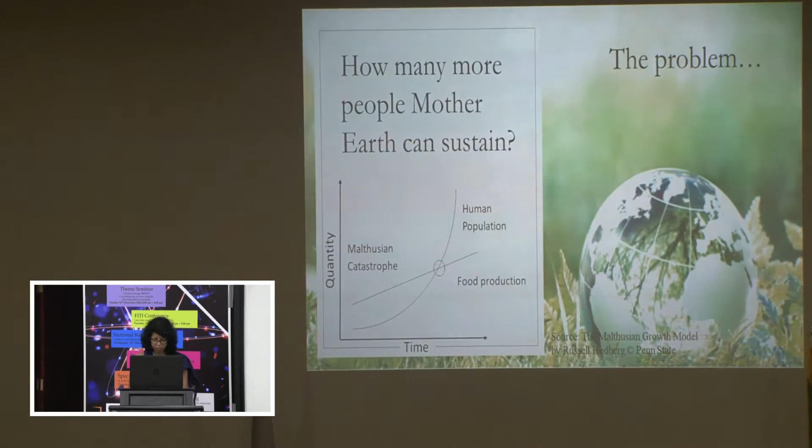Traditionally, the majority of construction materials are derived from non-renewable natural resources through mining and quarrying activities. With the increasing human population, there is an increased demand on natural resources to supply much needed building material.

Today, second only to water, concrete is the most consumed material in the world, compared to all other building materials used combined in construction—this is as much as 2 times. According to world statistics, the total volume of cement production worldwide amounted to 4.2 billion tons in 2019, compared to 1.39 billion in 1995, indicating a more than 200% increase over a period of less than 25 years. World population growth over the same period is only 36%.

In 2019, global production of industrial sand and gravel was an estimated 330 million metric tons. According to the World Steel Association, construction is one of the most important steel-using industries, accounting for more than 50% of the world's steel demand.

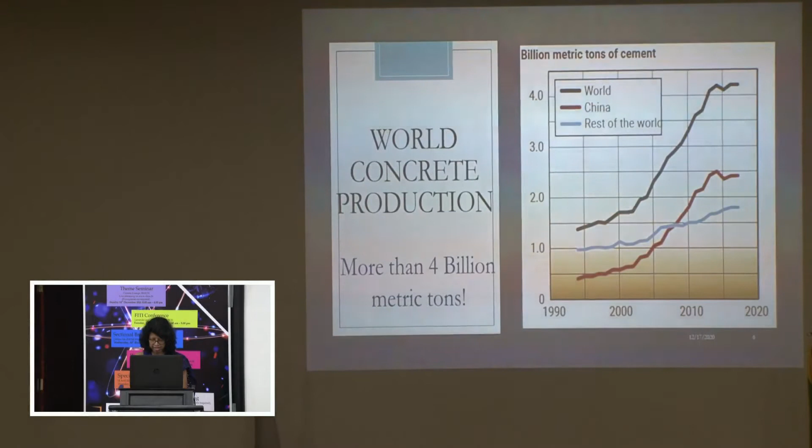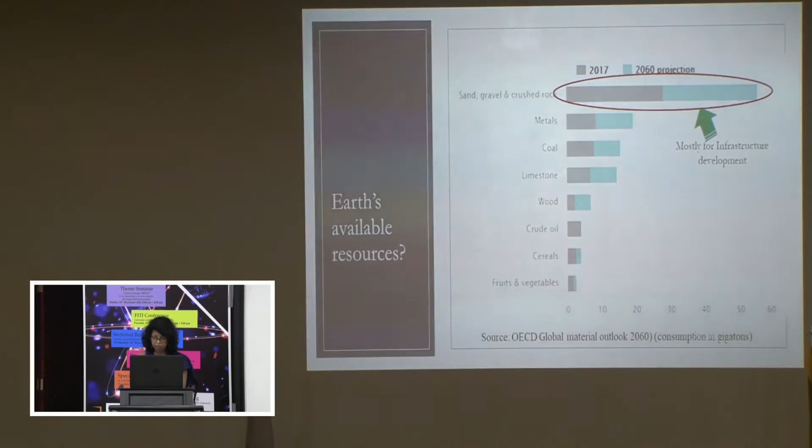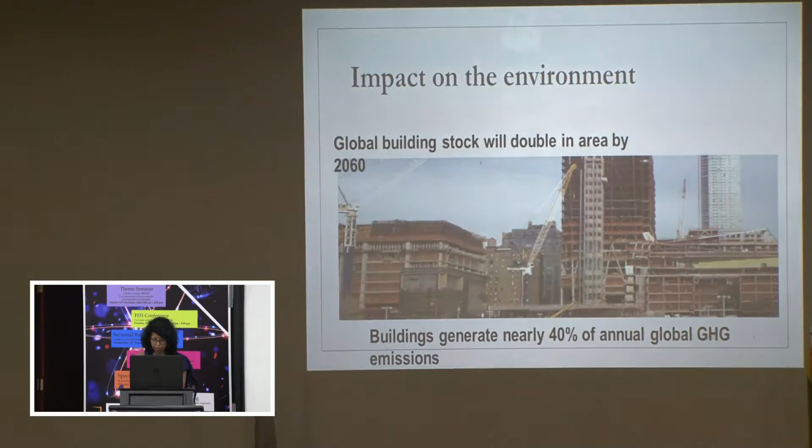There is enough evidence to conclude that the construction industry is one of the most impactful sectors in any economy. The toll on global material resources, energy and water use, as well as waste generation due to the construction industry is highly significant. Construction industry is responsible for 33% of material consumption, 11% of global energy related CO2 emissions, and 54% of landfills due to lack of proper end-of-life cycle management methods.

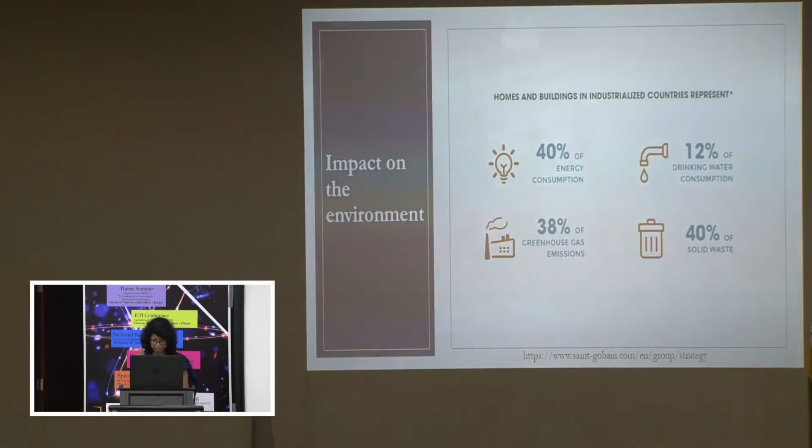It is clear that building materials have an environmental impact at every life cycle stage: extraction, processing, manufacturing, transportation, construction, demolition, and disposal at the end of the building's useful life. It has been estimated that the production of 1 ton of Portland cement releases 1 ton of carbon dioxide to the atmosphere. Carbon dioxide, being a greenhouse gas, contributes to global warming, and the cement industry alone generates about 7% of it.

One of the biggest environmental problems related to infrastructure development is energy use. The global building sector consumes around 36% of the world's energy.

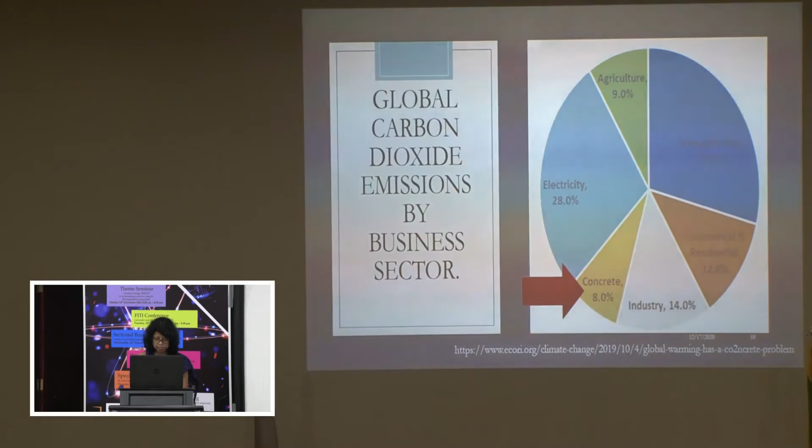According to the World Resources Institute's Climate Analysis Indicators tool, Sri Lanka's GHG profile in 2011 was dominated by the energy sector, contributing 40%, followed by waste, land use change, and forestry. Energy sector emissions are dominated by transportation with 39%, while electricity and heat contributed 28%. Other fuel combustion, manufacturing, and construction contributed 27% and 5% respectively.

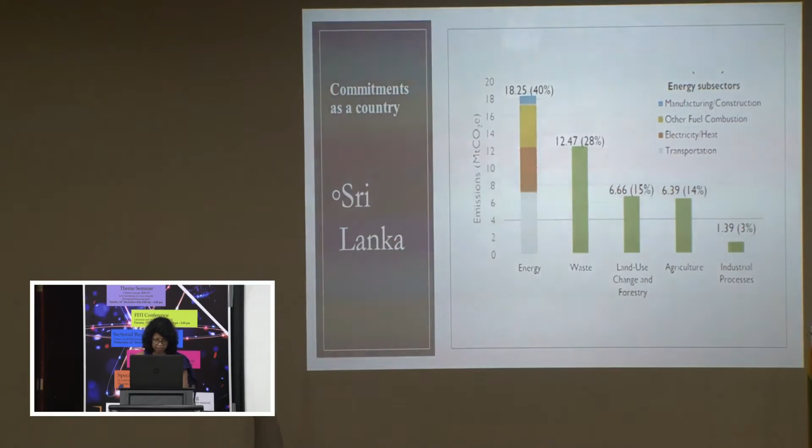Given the fact that the majority of electricity and heat contribution is associated with the operational energy of buildings and associated infrastructure, it can be seen that as a whole, the construction and operation of the country's building stock is responsible for nearly 33% of Sri Lanka's GHG emissions.

As a country, Sri Lanka contributes 45 million metric tons of carbon dioxide equivalent to the total world GHG emissions. Although this is only 0.1% of global emissions, this has significant impacts on the country, having a US dollar 36,000 million GDP economy. With the carbon intensity of Sri Lanka's economy at approximately 1.5 times the world's average, there is potential to reduce GHG emissions relative to the GDP.

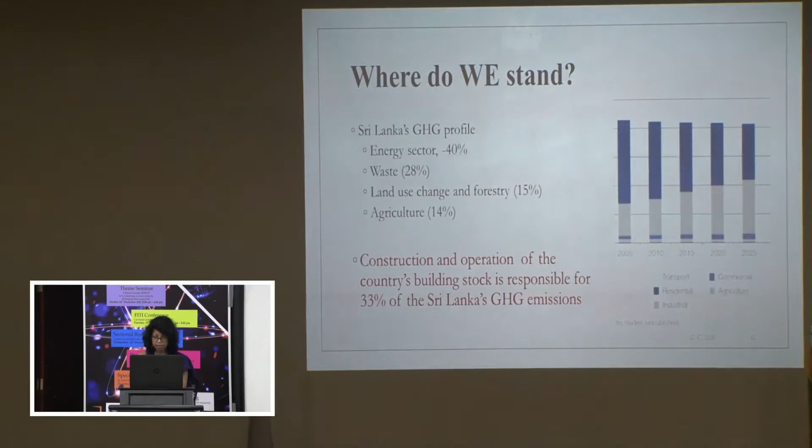In its intended nationally determined contribution, Sri Lanka has communicated its intent to reduce GHG emissions unconditionally by 7% by 2030, compared to a business as usual scenario with 2010 as a base year, planning to achieve 4% from energy and 3% from the other sectors.

Concrete in construction - the Colosseum in Rome is a good example of the durability of concrete, which is a composite of sand, aggregate, and water mixed with a lime-based, kiln-baked binder.

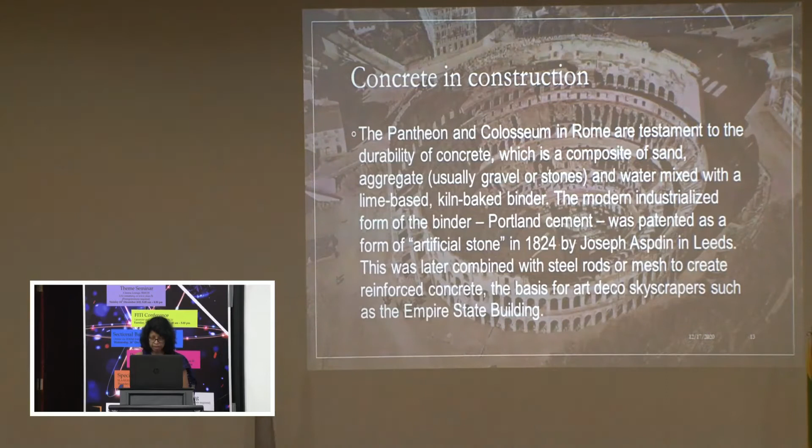Look at the tallest concrete building in the world, Burj Khalifa in Dubai. This has consumed 330,000 cubic meters of concrete and 39,000 tons of steel.

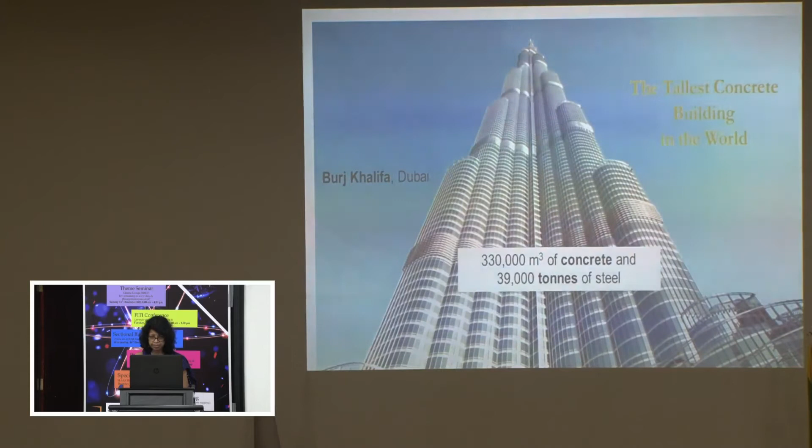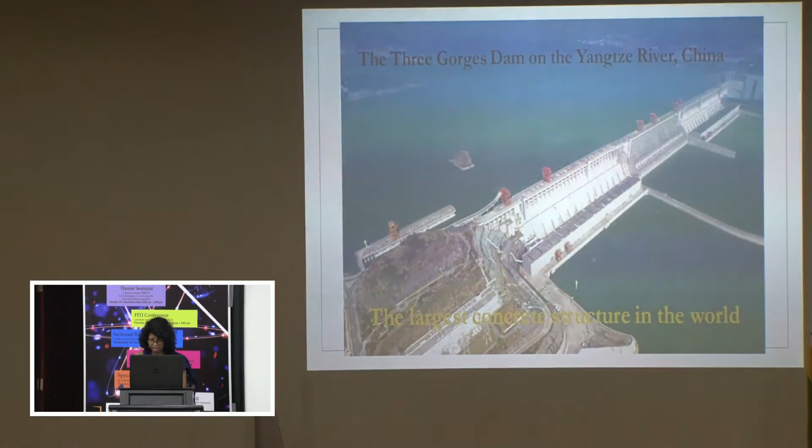Next, have a look at the largest concrete structure in the world. The Three Gorges Dam, built on the Yangtze River in China, consumed 28 million cubic meters of concrete and 463,000 metric tons of steel.

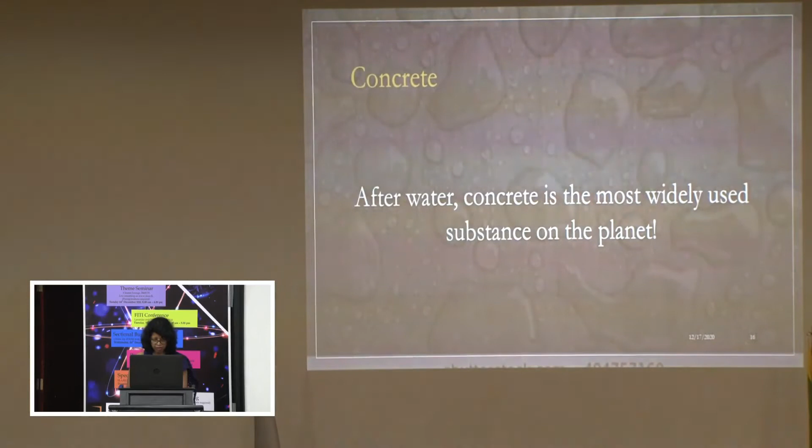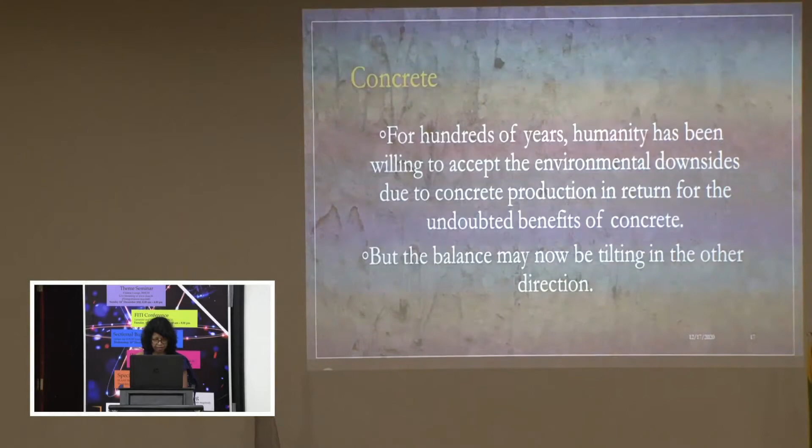After water, concrete is the most widely used substance on the planet. For hundreds of years, humanity has been willing to accept the environmental downside due to concrete production in return for the undoubted benefits of concrete.

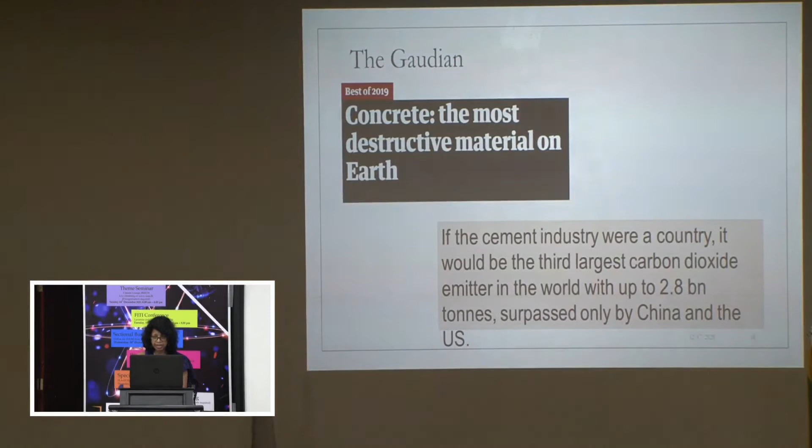On the other hand, according to the Guardian, concrete is the most destructive material on earth. Because of the cement industry, if the cement industry were a country, it would be the third largest carbon dioxide emitter in the world, with up to 2.8 billion tons, surpassed only by China and the US.

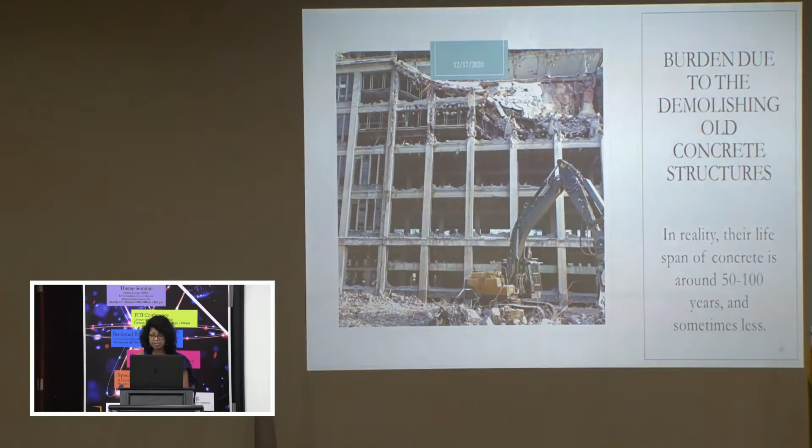In reality, the lifespan of concrete is around 50 to 100 years, and sometimes even less. Nearly 50% of demolished waste is due to concrete and related heavy building materials.

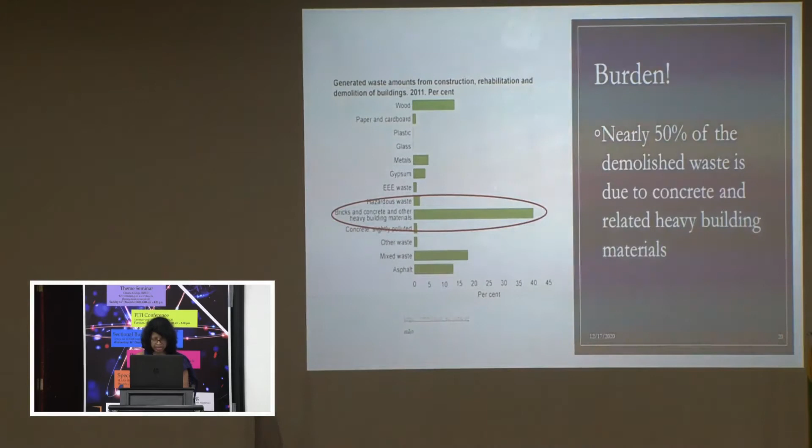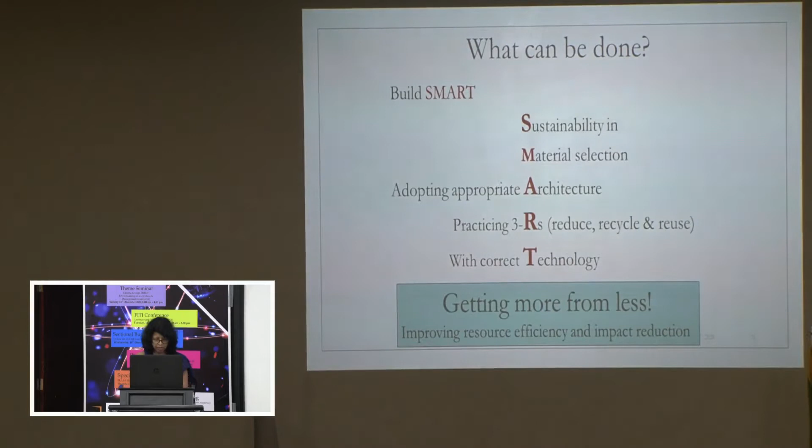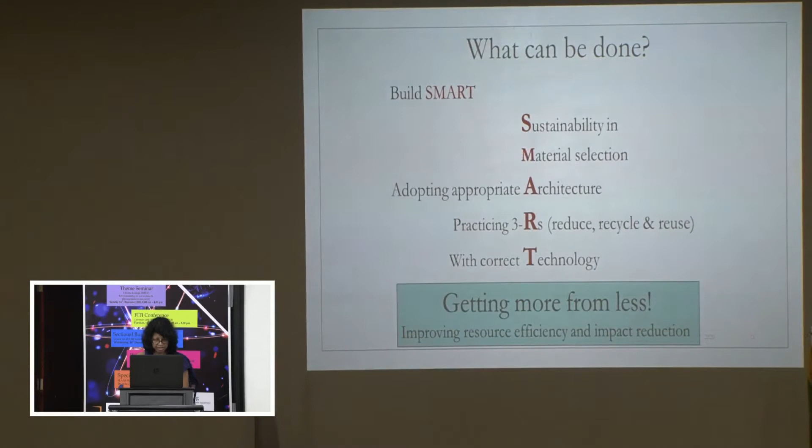What can we do about this? With growing concerns over climate change and the finite nature of available resources, there is increasing pressure on the construction industry to optimize resource efficiency and reduce environmental impacts.

World population will continue to grow in the next 30 years, accompanied by rapid urbanization. As the need for buildings and infrastructure continues to grow worldwide, reducing consumption of natural resources and increasing the use of alternative or recycled material, while reducing associated emissions, is crucial for future sustainability.

As mentioned earlier, concrete is the second most consumed commodity after water in the world. Irrespective of its evident impacts on the climate, concrete is likely to remain the main construction material for many more decades to come. There are numerous ways the concrete industry can increase its compliance with the demands of sustainable development. Among them, increased use of alternative cementitious material, increased reliance on recycled material, improved mechanical properties, and reuse of wash water can be identified.

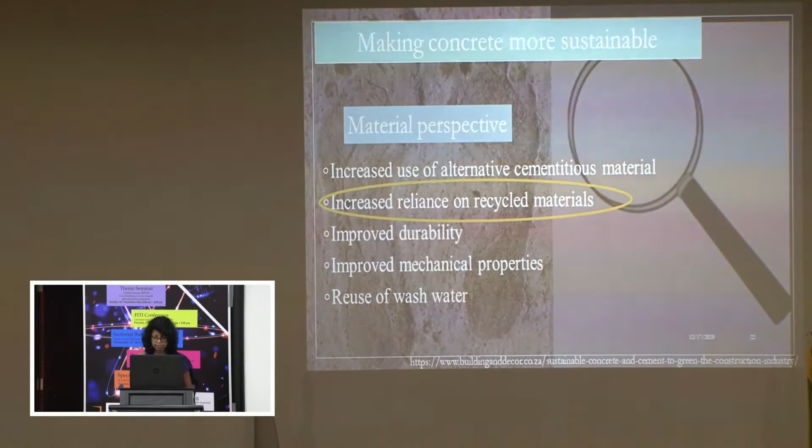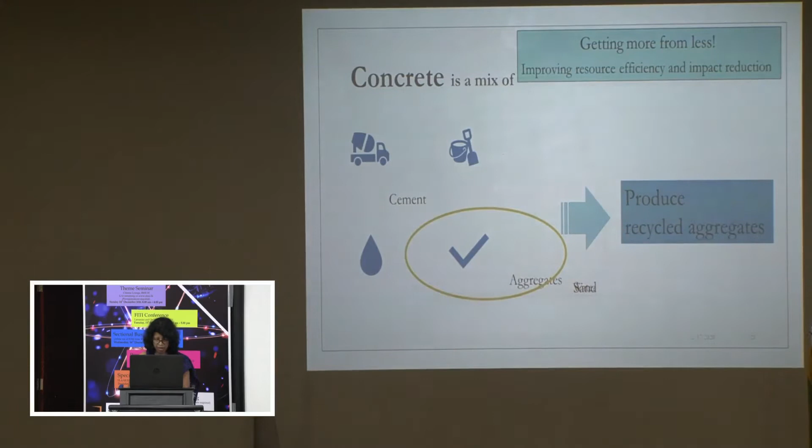Research has shown that it is possible to substitute cement with alternative byproducts from different industrial processes such as fly ash, rice husk ash, and slag, with positive impacts. Aggregate constitutes the bulk of concrete. Therefore, effective use of recycled aggregates will lessen the demand for virgin material.

Although the reuse of demolished concrete to produce fresh concrete began as early as 1945, much remains to be investigated.

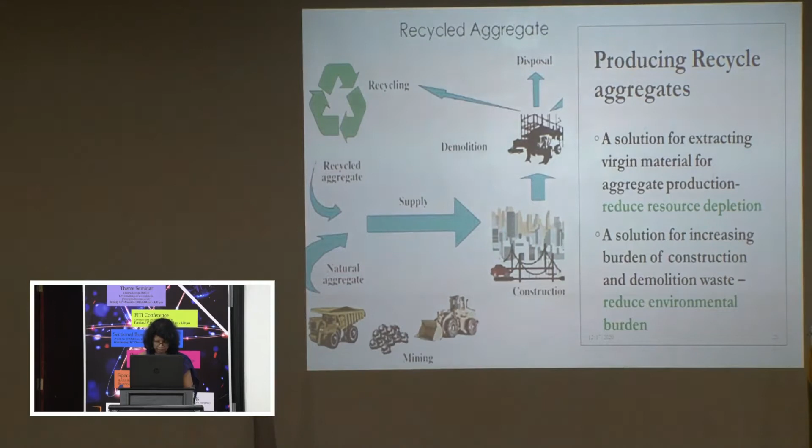Almost half of the virgin aggregates in the world are used in the construction industry each year. The annual amount of construction and demolition waste produced in Sri Lanka exceeds 4 million tons, and management of this waste has already become an environmental problem as demolished waste is mostly dumped in landfills.

Much research has been conducted in Sri Lanka, as well as elsewhere, to investigate the suitability of recycled aggregates as a construction material to produce structural concrete. Let us have a look at the local recycled aggregate properties, as well as properties of concrete in structural elements made of recycled aggregates.

Usually, recycled aggregates have higher water absorption as well as Los Angeles abrasion value than natural aggregates, due to the attached mortar on recycled aggregate surfaces.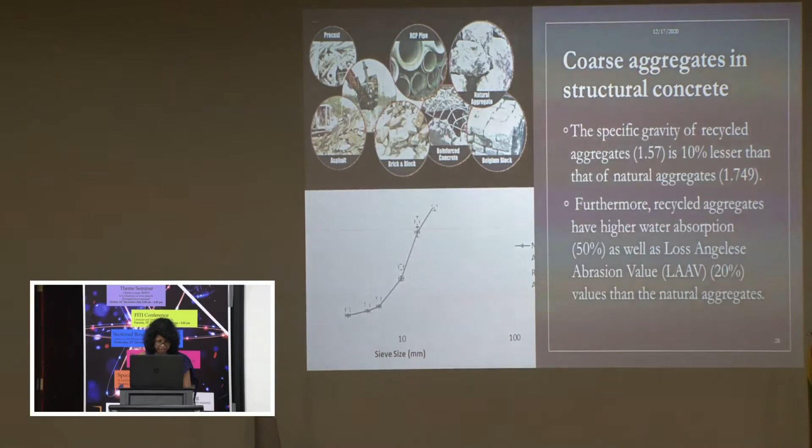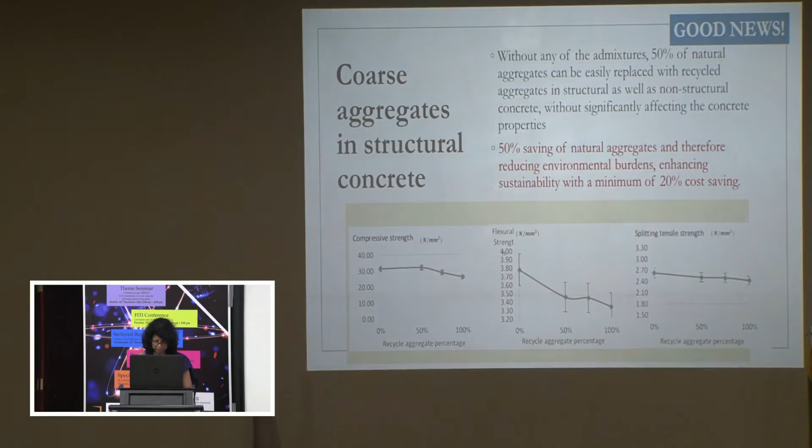The research revealed that 50% of natural aggregates can be easily replaced with recycled aggregates in structural as well as non-structural concrete without significantly affecting concrete properties, and without using any admixtures. This will lead to around 50% saving of natural aggregates, therefore reducing environmental burdens, enhancing sustainability, with a minimum of 20% cost reduction.

Estimated fine aggregate, that is sand, demand as of 2018 in Sri Lanka was about 22 million cubic meters. The majority of this sand demand is met by natural river sand in the country. Excessive extraction of sand from rivers results in widely ranging impacts. On the other hand, the high demand for fine aggregates has increased sand prices significantly over the last several years.

Therefore, finding an alternative to natural sand in the construction industry is a major topic that has cropped up every so often. We have looked at the use of recycled aggregates manufactured from construction waste as an alternative for fine aggregates in bedding mortar. It was seen that all the fine aggregate mixes we tested fell mostly within the standard envelope accepted for fine aggregates used in bedding mortar applications.

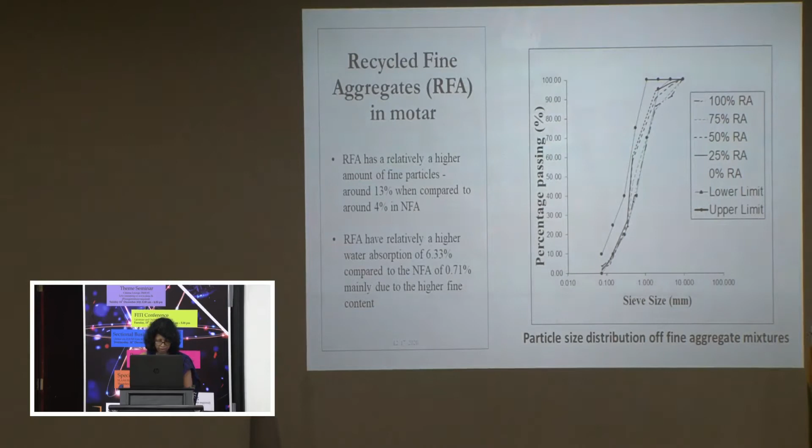It would be seen that 50% of natural fine aggregates can be easily replaced with recycled fine aggregate at a higher water cement ratio, around 0.7, to achieve optimum workability as well as strength, while achieving up to a 50% cost reduction and enhanced environmental sustainability.

The negative attributes due to higher fine content as well as chloride content can be negated by a simple washing process, allowing a higher replacement of recycled fine aggregates.

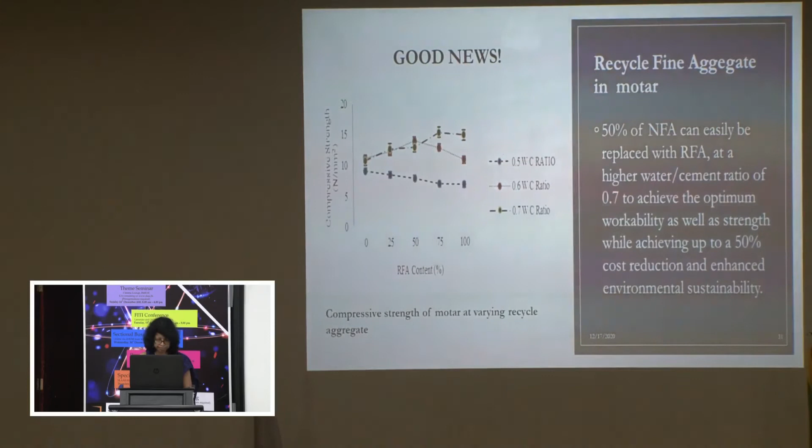Overexploitation of conventional building materials such as clay, river sand, and soil to make walling materials such as bricks, cement sand blocks, etc. has caused numerous environmental problems due to mining of the same. Also, ever-increasing demolition waste management has become another challenge today.

In an attempt to find a cost-effective and environmentally friendly alternative walling material, the suitability of recycled fine and coarse aggregates to produce concrete hollow blocks was investigated.

The 28-day compressive strength of all the types of recycled aggregate hollow blocks were able to meet the minimum requirement as per the SLS 855 standard of 1.5 newtons per millimeter square.

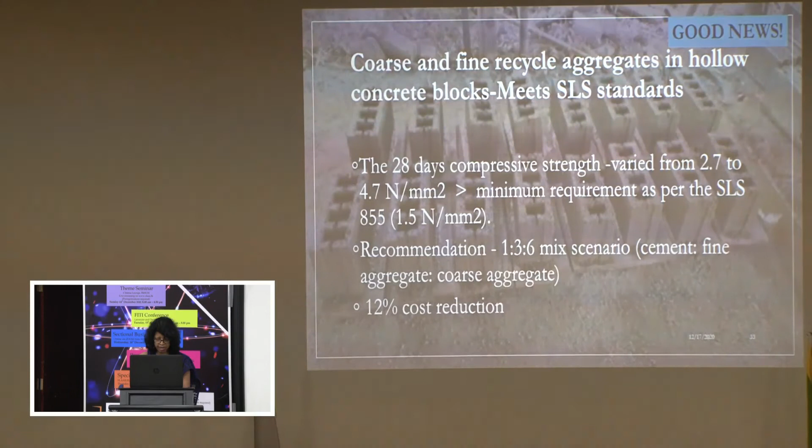It was seen that a mixture of 1:3:6 was the most economical among the studied mixtures. Recycled concrete hollow blocks have the potential to give a cost-effective, sustainable solution to manage the increasing volumes of demolished waste as well.

The major drawbacks that hinder the use of recycled aggregates in structural concrete are found to be its porous attached mortar on the surface of recycled coarse aggregates and the micro cracks formed on the surface of recycled aggregates during its manufacturing process.

The porous surface of recycled aggregates increases the water absorption capacity drastically. The workability of concrete made with recycled aggregates consequently will have varied due to its high water absorption.

Due to high porosity of recycled aggregates, the interfacial transition zone, that is ITZ, between the new cement paste and recycled aggregate becomes very porous and weak, leading to low strength gain in concrete.

It has been found that if the bond between recycled aggregates and the new cement paste could be strengthened, the negative effect it has on the properties of concrete can be negated.

It would be possible to enhance the strength of the aggregate and reduce the water absorption at the same time if the pores present on the surface of recycled aggregates could be filled with finely divided mineral admixtures.

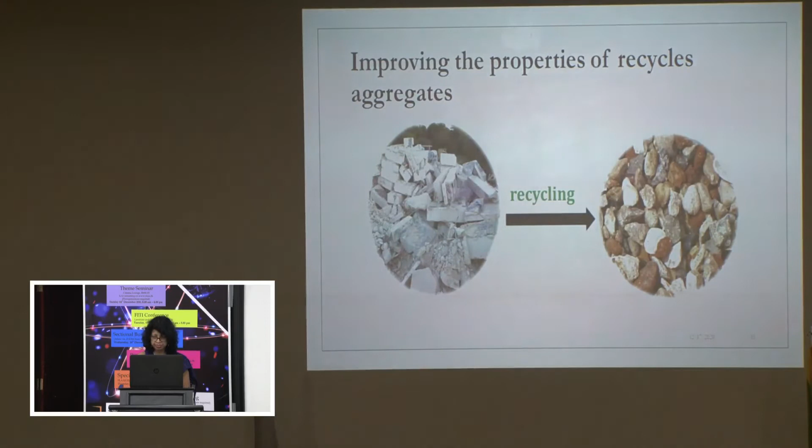This will strengthen the ITZ, thereby strengthening the concrete made with it.

Rice husk ash, a good pozzolanic material as well as a commonly found waste material in Sri Lanka, was selected to improve the recycled aggregates in this work.

Rice husk ash is a waste produced from the parboiling process of rice. The rice plant absorbs silicon dioxide from the substrate and stores it in the husk of the rice grain. Consequently, rice husk ash has a high percentage of silicon dioxide, which is a good pozzolanic material.

It was observed that the incorporation of rice husk ash in concrete can reduce permeability, enhance workability, reduce heat evolution, and obtain large strength gains.

We studied the effectiveness of varying proportions of recycled rice husk ash cement slurry as a microfiller to improve the surface properties of recycled aggregates, enabling the reduction of high water absorption.

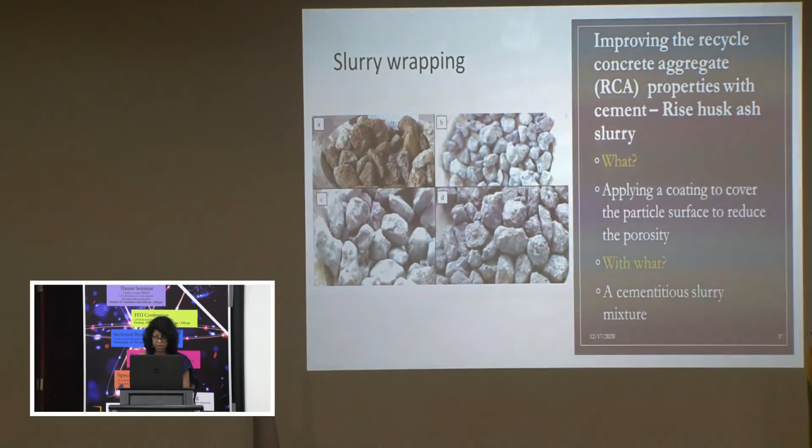Micromorphology studies done on recycled aggregates improved with carbonation and surface treatment methods have shown that carbonation significantly improves the mechanical properties and the drying shrinkage resistance of the recycled concrete.

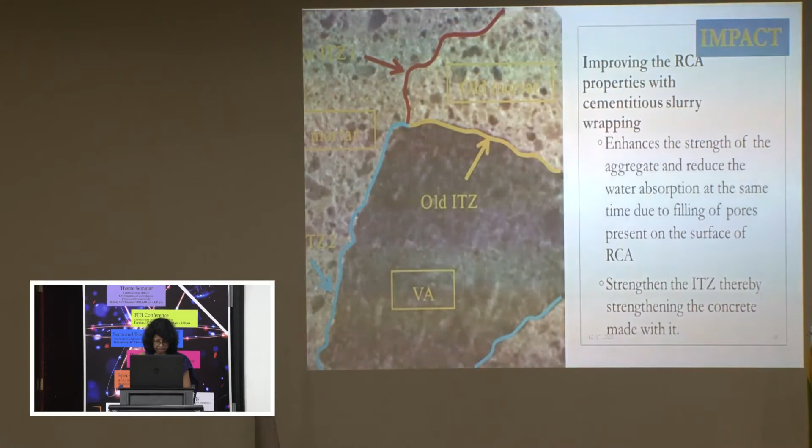Further, the slurry wrapping technique used has greatly enhanced the aggregate properties as well.

Concrete made with both treated recycled aggregates and natural aggregates achieved a 28-day compressive strength of 30 newtons per millimeter squared. The slump of treated recycled aggregate concrete was observed in the specified range of 60 to 180 millimeters as well.

It was seen that the negative impacts of recycled aggregates on the fresh and hardened concrete properties can be negated by the treatment method being proposed as well.

A clear methodology for commercial scale reuse of construction and demolition waste in concrete could be designed by integrating the slurry treatment method into the crushing plant process.

This would increase resource efficiency, while recycling of construction debris as an aggregate can be considered a vital step towards achieving sustainability in concrete construction and in the country.

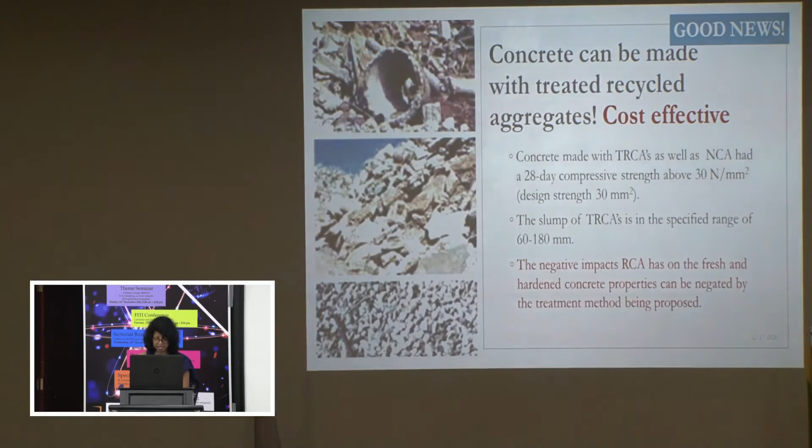A green roof is a specially engineered rooftop that supports plant life. Green roofs regulate building internal temperature and reduce building heating and cooling costs, while also functioning as a sustainable decentralized stormwater management system by reducing runoff as well as replacing vegetation, providing an aesthetically pleasing environment in the same location.

Also, structures such as buildings, roads and other infrastructure absorb and re-emit the sun's heat more than natural landscapes such as forests and water bodies.

Urban areas where these structures are highly concentrated and greenery is limited become islands of higher temperatures relative to the outlying areas. Daytime temperatures in urban areas are about 1 to 7 degrees Fahrenheit higher than in outlying areas, while nighttime temperatures are about 2 to 5 degrees Fahrenheit higher.

Green roofs also help to reduce these urban heat island impacts. There are two categories of green roof designs: intensive green roofs, which are gardens supporting large trees and shrubs, and extensive green roofs, which support plant species such as herbs, grasses, and mosses.

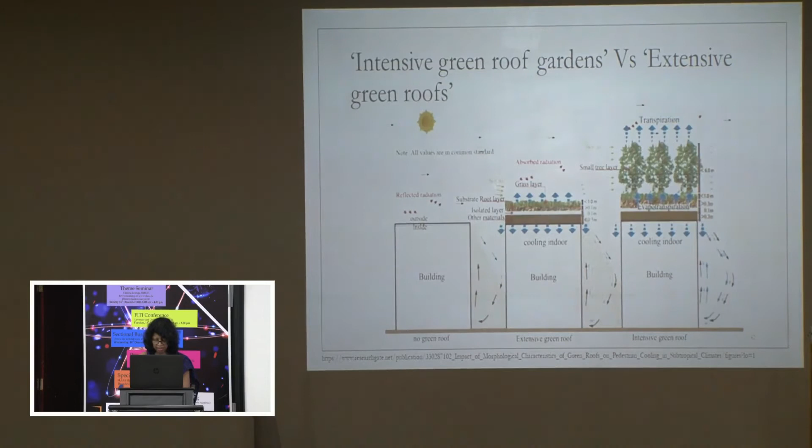Intensive green roof gardens generally need a deeper substrate and regular maintenance, while extensive green roofs are usually designed to have ecological function rather than aesthetic. Green roofs usually consist of several layers such as waterproofing, insulation, drainage, geotextiles or filter layer, growing medium, and finally the vegetation.

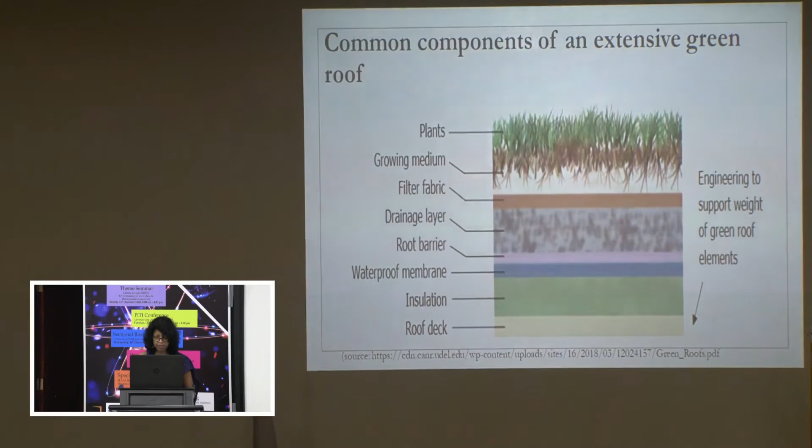Irrespective of the numerous benefits the green roof brings into the built environment, the added imposed load on the building structure leads to larger structural elements. This will lead to added costs and material overuse. Therefore, if the self-weight of the green roof can be reduced while retaining the already identified benefits, the green roofs will serve their full sustainability impacts on green buildings.

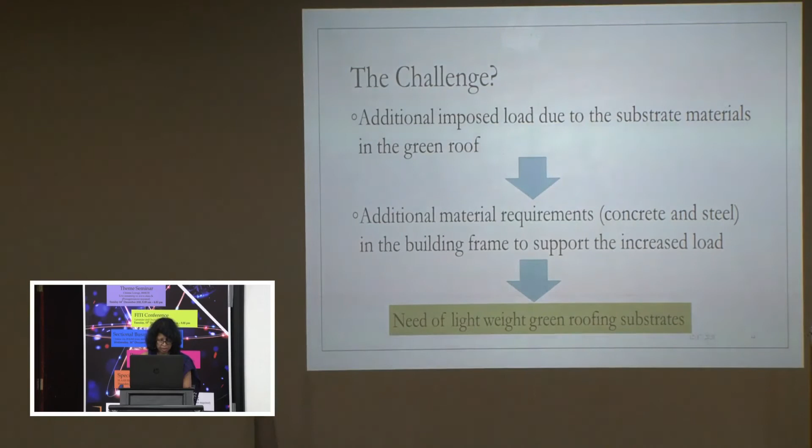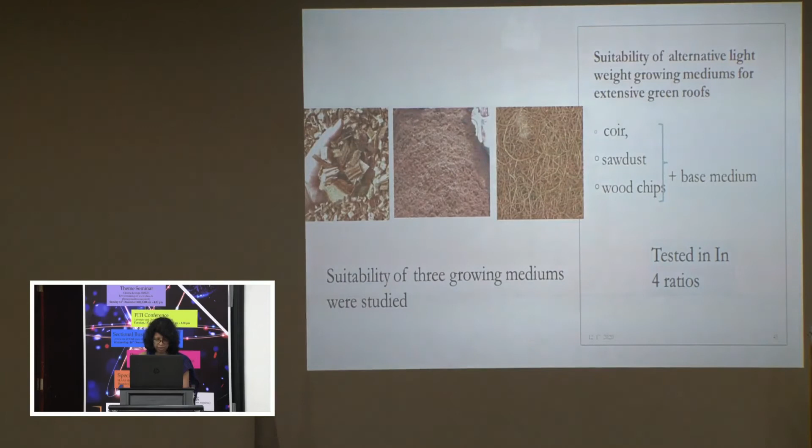Suitability of three growing mediums such as coir, sawdust, and wood chips mixed with a base medium at different mixed proportions was studied, and the thermal performance during heat gain and loss, stormwater retention capacity, and drought tolerance were monitored. Coir growing medium showed the overall best performance; hence a mixture of base medium and coir at 60-40 proportion with a 40mm thick layer could be recommended to achieve the optimum outcome.

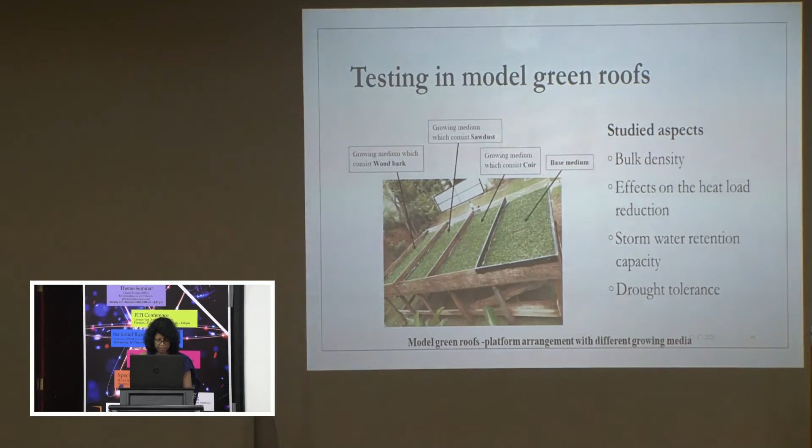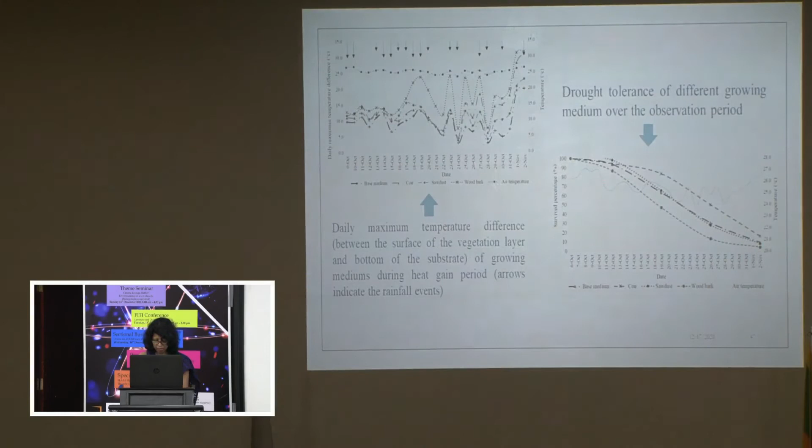However, further studies are needed to further optimize the unit weight of the selected growing medium by investigating the optimum growing bed thickness.

Sustainable resource consumption and production is one of the 17 SDGs Sri Lanka needs to achieve as a country. Sustainability of the construction industry can contribute to Sri Lanka achieving this goal in an efficient manner. Sustainable use of different construction materials, water, and energy in projects will allow all stakeholders involved to build and operate such facilities in a better manner. Reduction of rapid resource depletion and less environmental pollution can be considered great benefits to a country and its citizens.

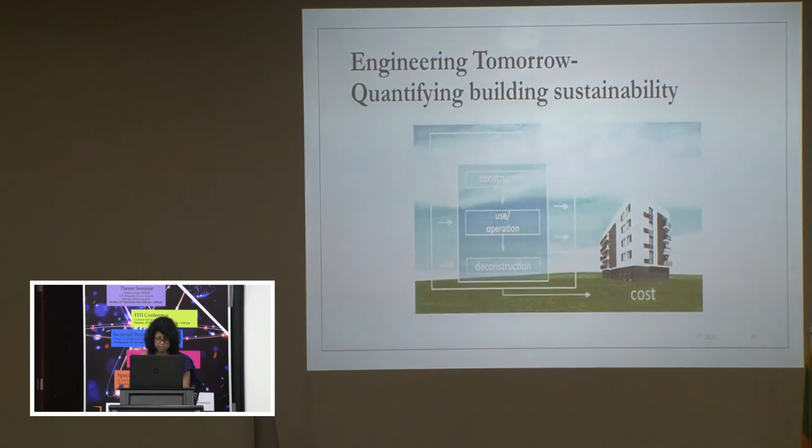Though the impacts due to building infrastructure are well understood, the quantification of the same is very complicated due to numerous factors such as the complex nature of the inputs used, long lifespans leading to complications in operation and demolition stage, varying use of technology in different countries and regions, etc.

Also, understanding environmental impacts is made more difficult due to the interrelating nature of different pollution inputs on air, water, and soil. Models, if used correctly, can be considered very versatile tools to understand and interpret such complicated scenarios. Building models using a life cycle assessment approach can help in deciding on the best materials and processes with the lowest impact on the environment.

This approach can also be used to compare materials, building design forms, and possible construction, operation, and demolition energy and water requirements at the same time, and make informed decisions at the design stage itself.

Projects seeking green rating accreditations locally or internationally need to make claims on use of energy, water, and building materials showing the environmental impacts. However, the unavailability of detailed assessment techniques and local data has hindered such requirements in Sri Lanka.

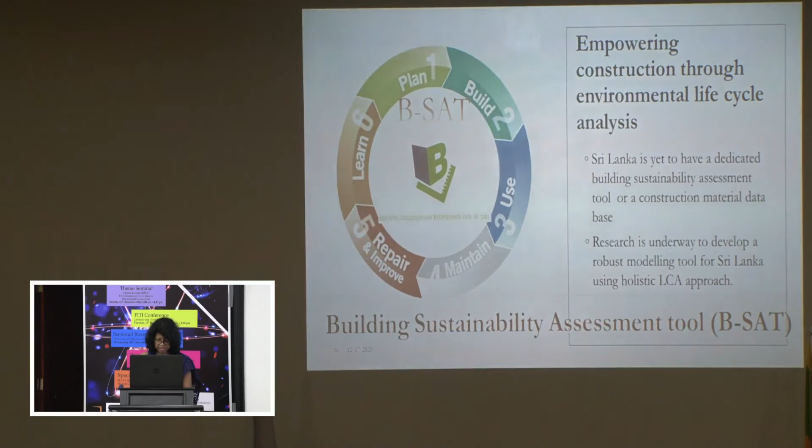National Research Council funded research is underway to develop a robust modelling tool considering the holistic nature of sustainability and an integrated approach based on multiple aspects, which is essential to assess sustainability of building projects using a life cycle approach.

The model will help engineers and architects in the construction industry to analyze their projects with respect to sustainability as well as economical dimensions. Furthermore, they would be able to make informed decisions regarding the selection of resources such as energy, water, building materials, as well as construction methods in infrastructure projects to minimize global and local impacts such as material depletion, ozone layer depletion, eutrophication, etc.

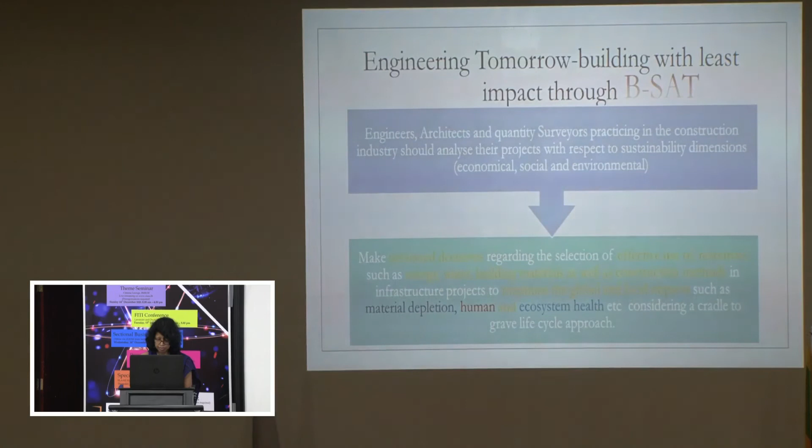Considering all, I call, let's engineer a better tomorrow for you, for your sons, and for your daughters. Thank you.